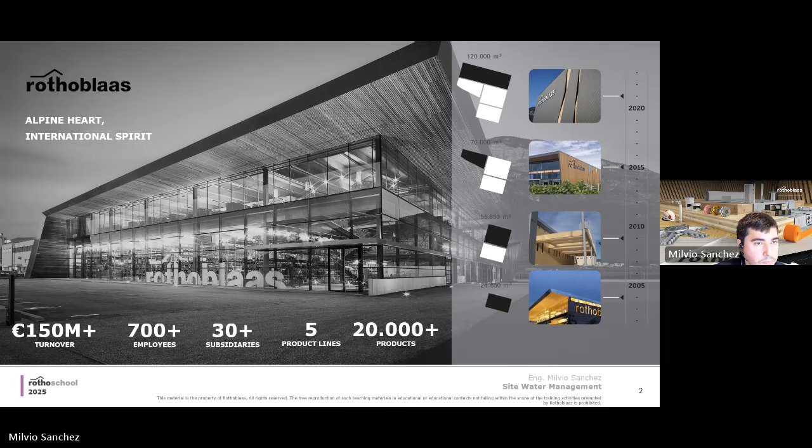For those of you who are not familiar with Rothoblaas, we are an international company. Our main headquarters is in northern Italy, in a city called Cortaccia, but we have 30 plus subsidiaries worldwide, 700 plus employees, and 5 product lines covering more than 20,000 products. Essentially, we are supplying products and manufacturing fasteners, connectors, air tightness and waterproofing like sealant, tapes, membranes, soundproofing, resilient profiles, mats for walls and floors for protection, and tools and machines for installers. So it's a full range for construction architects and engineers in the mass timber sector.

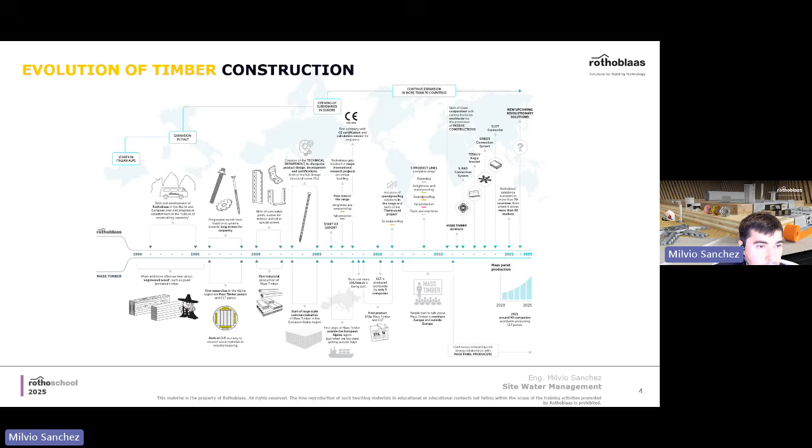A little bit of our history: we started in 1990, pretty much side by side with mass timber construction. Our owner, Robert Blaas, started selling tools out of a van, and then the business developed so much that we started introducing different lines, different ranges of products. In 2006-7, we introduced air tightness and fall protection, in 2011 soundproofing, and in the last trend, pretty much every single year we are launching more and more innovative connectors for mass timber.

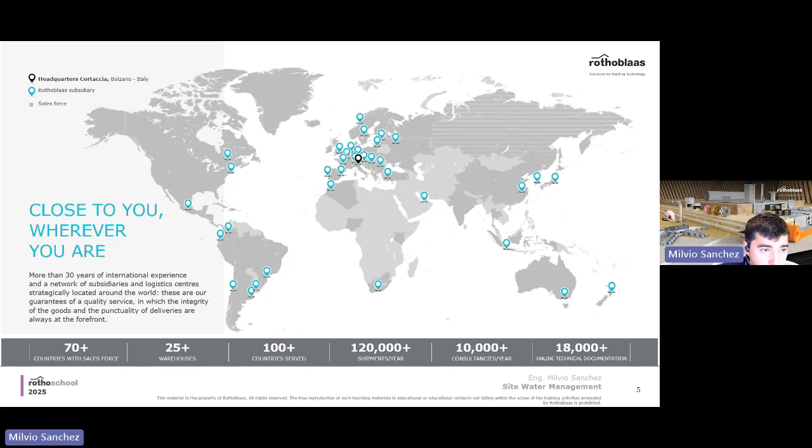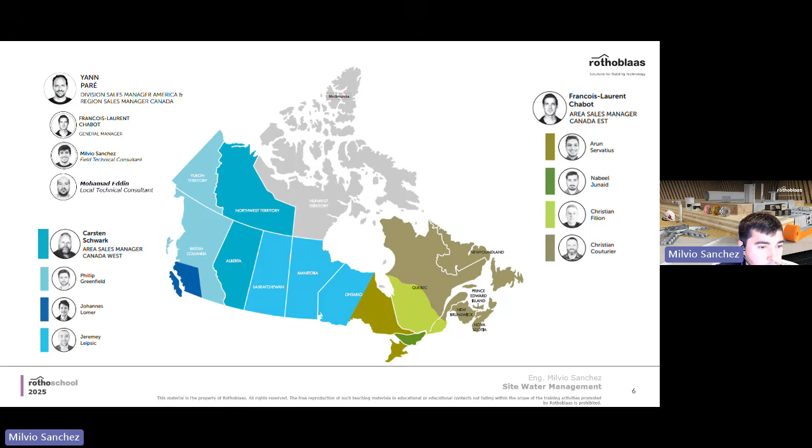Our footprint worldwide is quite wide, so we are pretty much everywhere. We can supply from different warehouses in different countries, but taking a closer look at North America, we have operations in Pennsylvania and Quebec, but we can supply products all over. In Canada, we have a big group, around 20 people, all across the country. It's a big country, so depending on the province, you may find different sales reps, different field engineers, and so on. Same in the US, we have a big group from east to west. Regardless of your inquiry, we're going to be able to supply you with products.

Going in more depth now in today's presentation, I'm going to go over 6 topics: context and challenges, understanding water risk on site, moisture and timber connections, which is a more structural topic, quality control on screws, design recommendations, and finally site water management best practices.

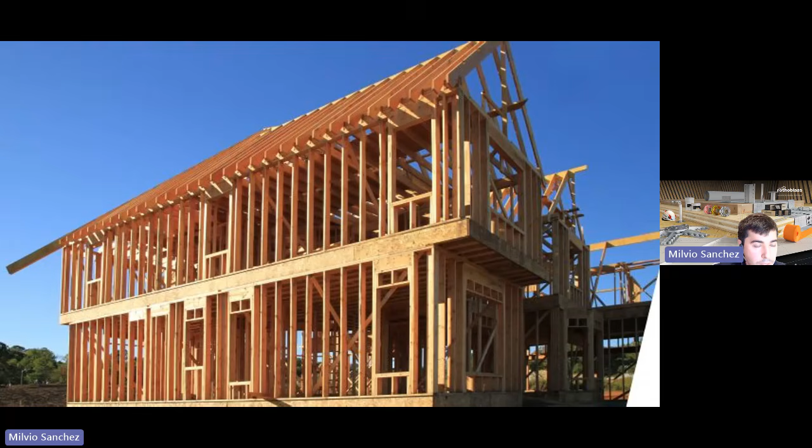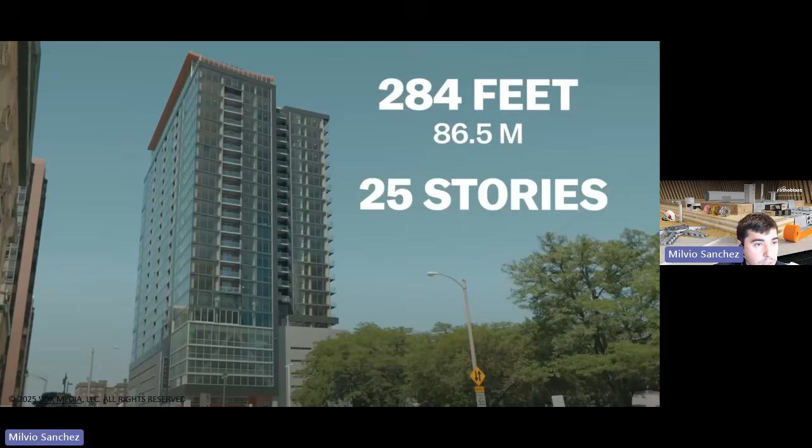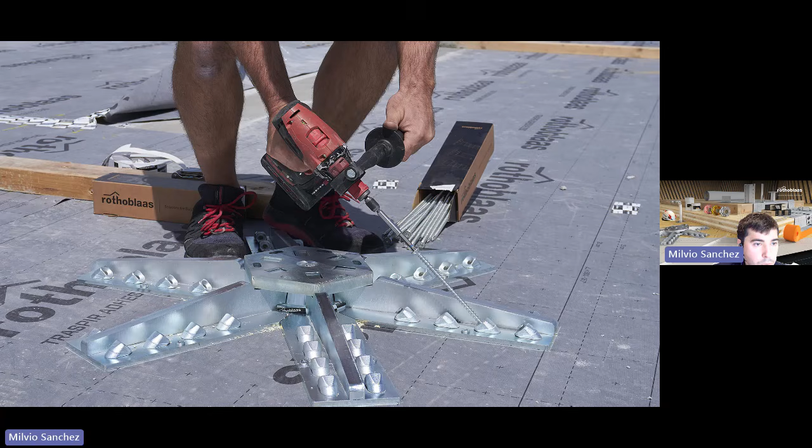As I said, we are going taller and taller, and the sky's the limit for mass timber. Every 5 years or so, when there is a code update, we are able to go higher. Connections usually were done in a simple way, like wood-to-wood connections with a single screw or a bunch of screws. Now the connections are much more complex, requiring several screws at different orientations for different purposes, with the presence of thick metal plates in conjunction with the wood.

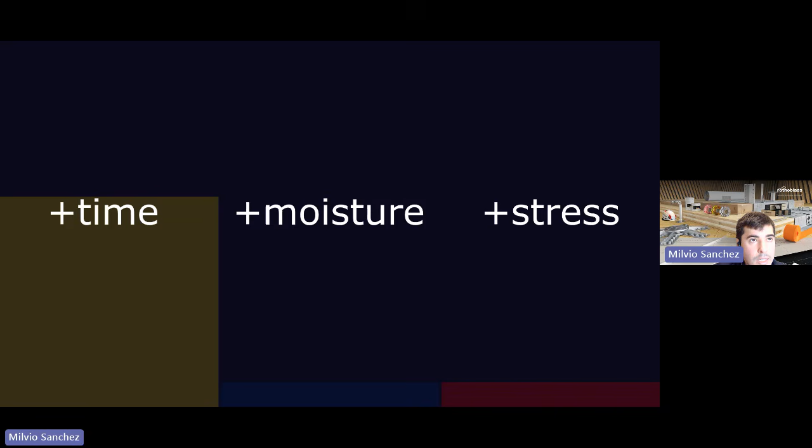The connections are now much more complex, dealing with much more different loading configurations and stiffness than before. Essentially we have larger projects, which is going to take more time to get built, meaning more time on the job site. And if you have larger projects, larger areas, this means larger exposure to weather, so more rain can happen on the job site, meaning more moisture.

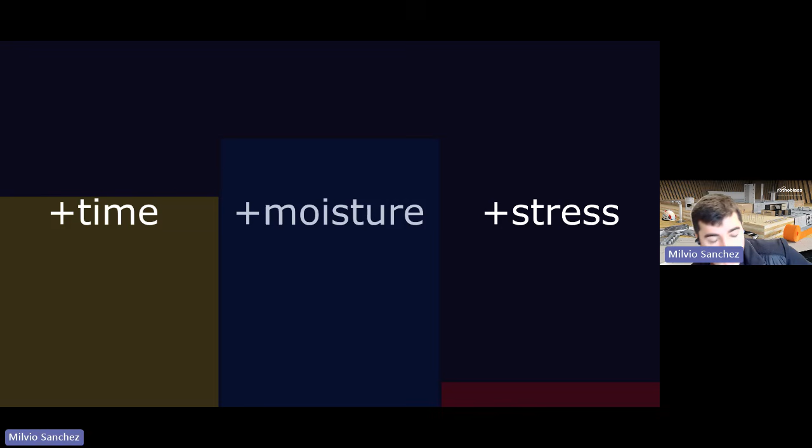With this hybrid concept in mind, different connections have to deal with different stiffness, for example a shear wall connected to CLT, which is a wood to concrete connection. We are talking about much more stresses and much more stiffness in the joints. This is important to understand the topic.

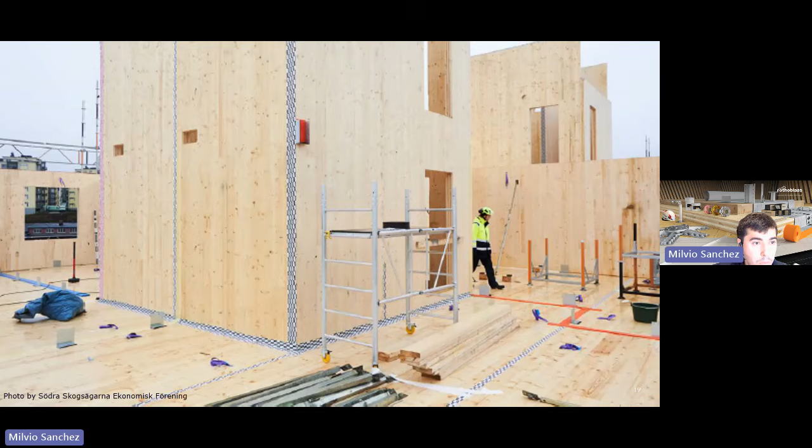Now we go to water risk on the job site. Water is inevitable in the job site. It's gonna rain, it rains everywhere. But depending on the project, depending on the criticalities, and depending on the detail, it might be less or more critical.

For example, here you see a project very nicely done where the CLT walls and CLT floors are all exposed, and tapes are applied in the CLT joints, as you see here, and then in the corners and the end grain of the walls. This is a perfect ideal scenario where the corners, end grain, everything is protected, but still the side grain is unprotected. I'm gonna give you more examples and some research data, and then by the end you can let me know if this is ideal or not, or it depends.

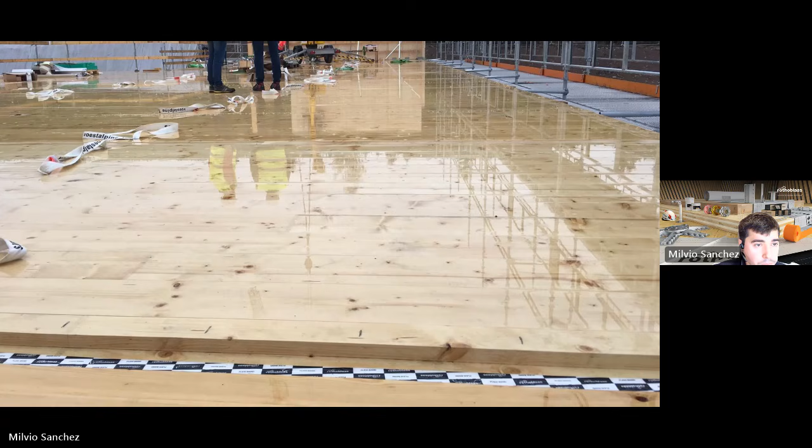Other cases where you see there is even a step, very good for trapping water. It is raining on the job site, and there is only a single strip of Rothoblaas flexi-band trying to do a miracle over there. It's quite funny, but I'm gonna show you some results that taping or no taping actually helps a lot.

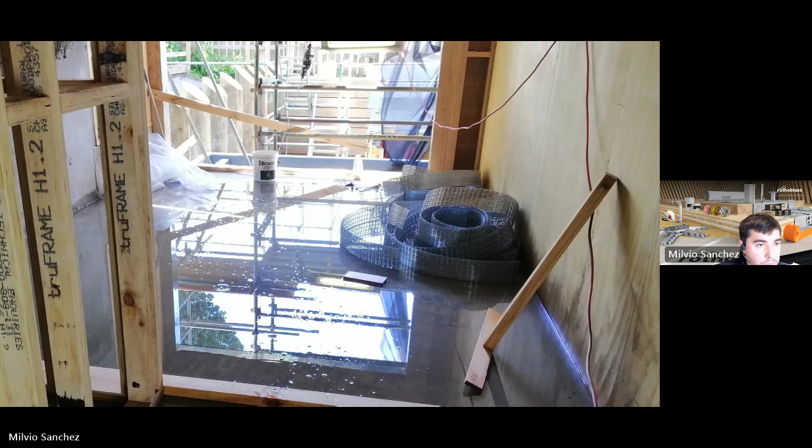Some other projects are not even fully built yet, but they are full of problems, as you see. Water pooling, and the CLT walls are already getting damaged, and decay is starting. It is evident here in this photo.

There are other conditions where the installers and the GC are much more thorough on the design, or maybe this was specified by the architects, where temporary breathable membranes were applied over the CLT panels. But this case is also not ideal. You see that water is forming on top of the membrane, so there is water pooling, and essentially this has to be wiped out. This is not suitable for those conditions.

But still, you can see it's a much more thorough process in terms of moisture mitigation here in this project.

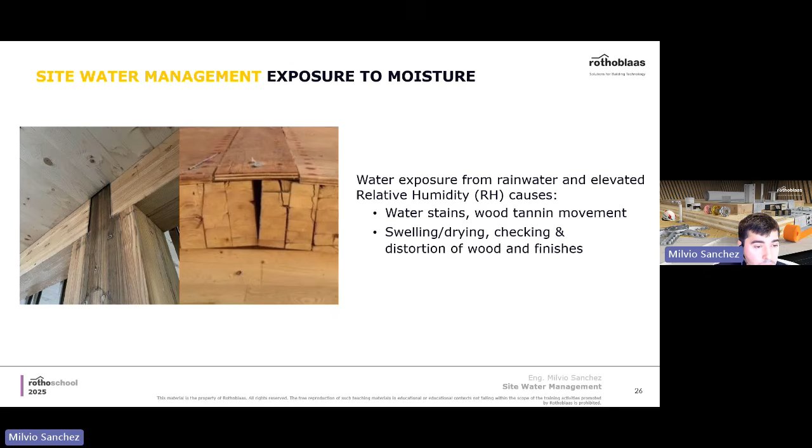It's aesthetically pleasant. There is a sense of biophilia. People are gonna feel warm, feel nice inside those environments. But there is a risk that it may stain, it may get discolored, the timber can rot and decay, and the structural risk where swelling, shrinkage, and distortion of wood and finishes may occur, as you can see here in this connection. So it's evident that water can cause some problems, right?

Talking about moisture content itself, there is a sweet spot which is 16%, where corrosion starts for fasteners. So anything below 16% is considered with zero corrosion. Anything above 16%, corrosion starts to happen, and by 20% moisture content and above, it gets intensified, following not a linear curve but more like an exponential pattern. And by 20% as well, we create all the conditions for fungi to develop and decay of timber to happen. So it's really important.

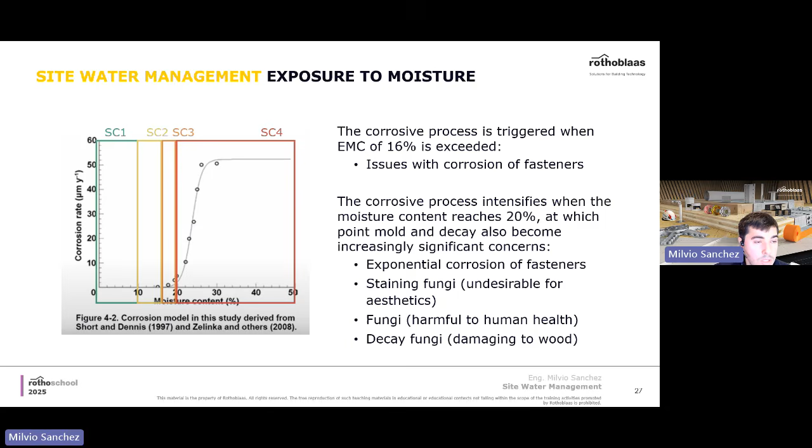So those were the thresholds defining what is the dry service and the wet service condition. Anything below 19%, for example, is considered dry, and anything above is considered wet.

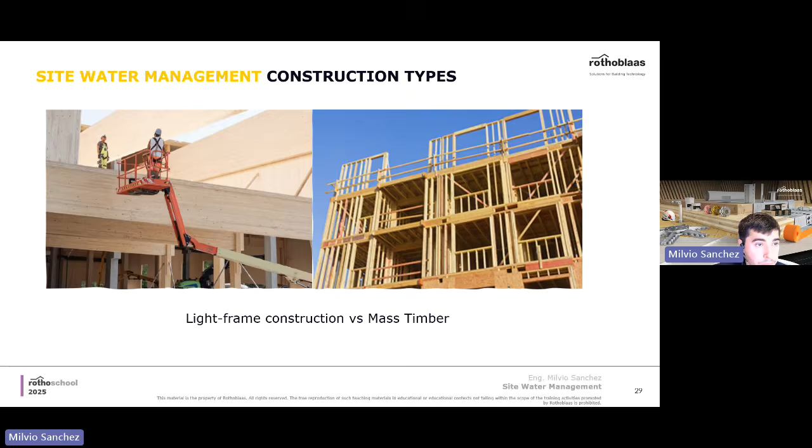I made a joke about taping or no taping, but here in these results there is some nice external research showing that either a half-lap connection between CLT or a butt joint, no matter what, if left exposed, will reach moisture content higher than 20%. One is going to be after 4 days and the butt joint after 17 days, but they're going to reach wet service condition in the field.

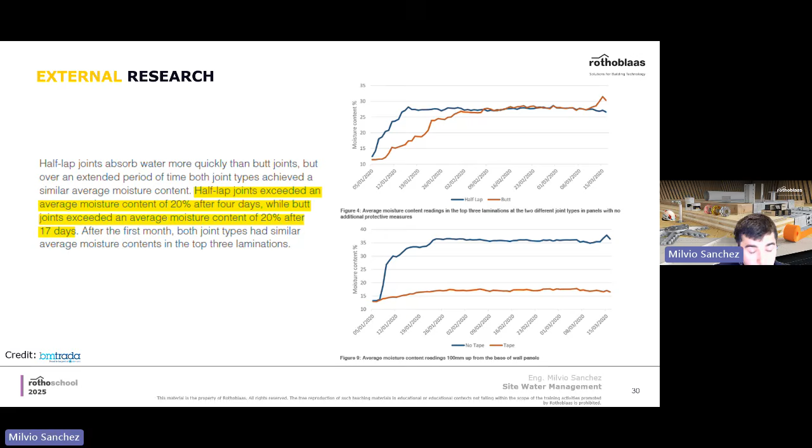But if you tape it, you maintain the moisture content of the panel below 20%, below 19%, and in this case you have a dry service condition. So the tape may seem something simple, but it helps a lot.

Here you can see some photos of the results. If you tape the end grain as well, you mitigate a lot of moisture traveling to the end grain, which travels 100 times faster than the side grain. Tapes are important, as I mentioned on the graph - it is relevant, but it's not a really moisture-proof configuration. Tapes have to be considered only as protection against short-term wetting, not as an effective long-term exposure solution.

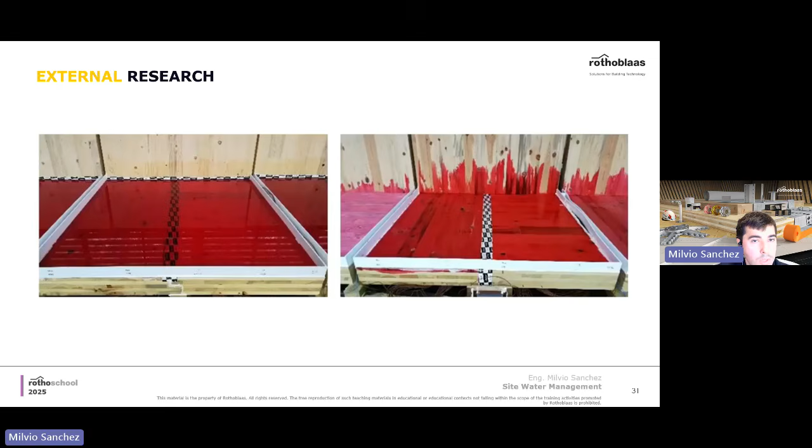There is other interesting research out there from RDH. They had a wet CLT on a job site, and the concrete was about to be poured over the CLT, and they were thinking: should I let the CLT get dry, or is it fine to pour the concrete? The CLT is going to dry out eventually.

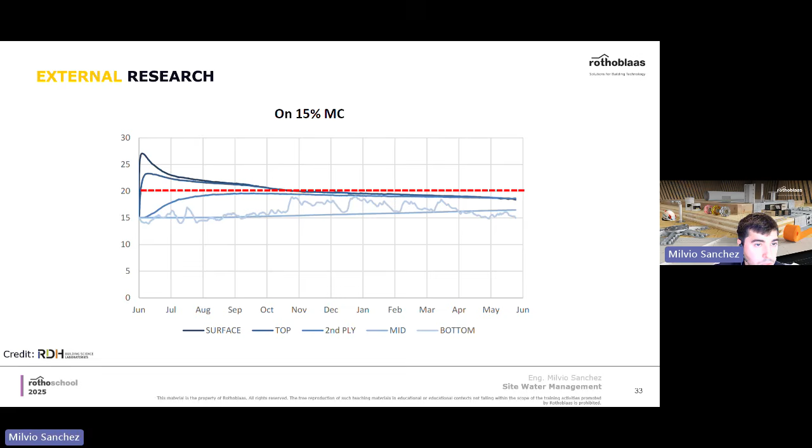This was a very interesting research where they investigated all the lamellas of the CLT and measured the moisture content. As you see here, in the first condition the surface and bottom lamellas of the CLT hold different moisture contents. But pouring concrete in this configuration, after pretty much a year from June to June, they were able to get this panel dry. So now we can call it a dry service condition for these panels.

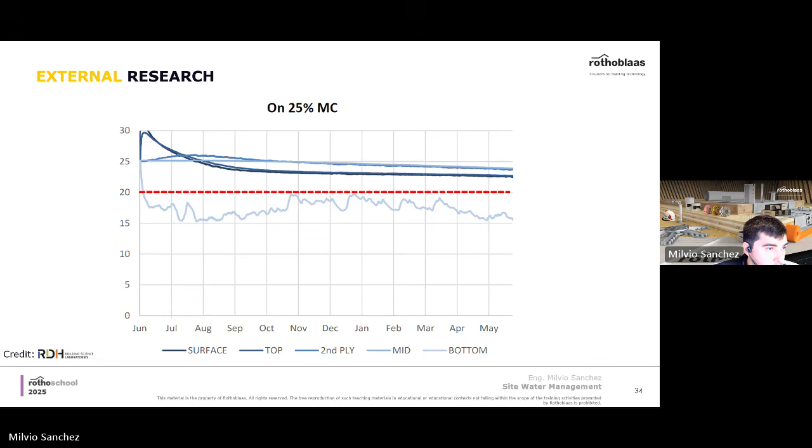In a much more wetter configuration here, June to June, still pretty much all of the lamellas are, let's say, just the bottom one is under a dry service condition, but all the others remain in a wet service. So this is a much more critical scenario. They also simulated one condition where they applied artificial rain, and the results are even worse.

So it's really important to point out that the side grain of the CLT also matters. As I said, it takes longer to get wet, but it also takes longer to get dry.

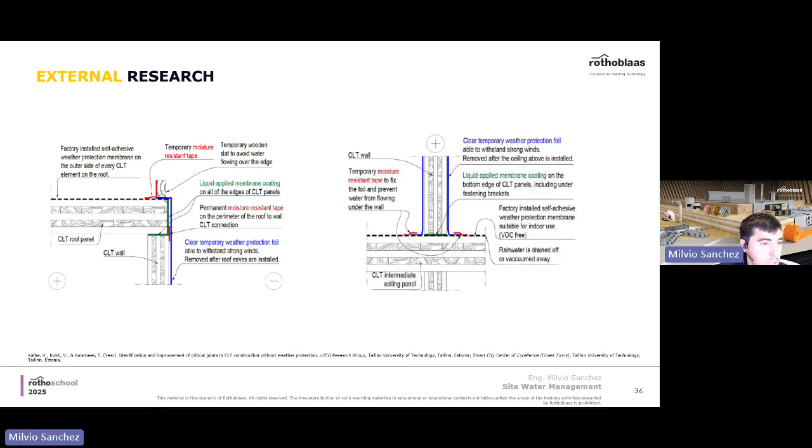Other researchers out there as well have really interesting recommendations. They mention that CLT panels have to be installed with a factory installed self-adhesive, either temporary or permanent membranes on the side grain, all the corners with a moisture resistant tape, end grain as well taped, and also liquid applied membranes could be used. So different conditions for different types of joints. Really interesting research out there.

Regarding mass timber construction, the target or threshold we should be aiming for is a moisture content of 16% before enclosing the project. This is a little bit different than light wood framing construction, which should be around 19%. But with mass timber it's really relevant to keep that number in mind.

This APA guide has some really relevant and interesting guidelines in terms of storing and handling of glulam beams, and this also works for CLT panels - protecting from rain, not leaving it exposed to the ground, leaving gaps for ventilation, protecting from the sun. This may seem obvious, but it's nice to have it there in a specific guide.

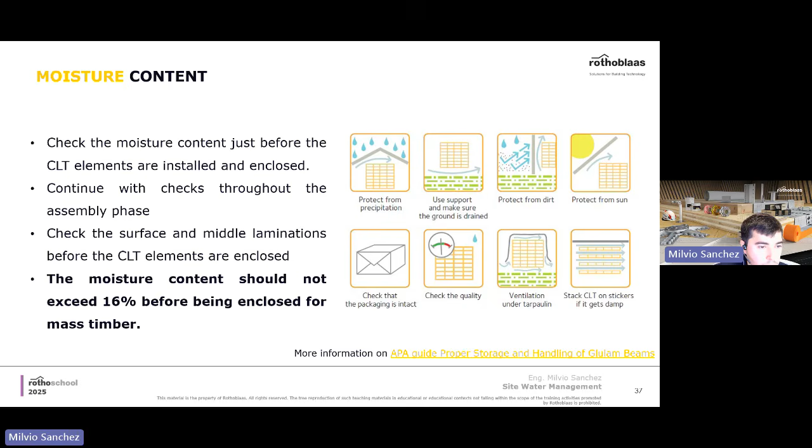Now we are changing the topic. We're going to hit a more structural topic, which is moisture in timber connections and the behavior of moisture. What can happen in a timber connection? What are the effects and consequences?

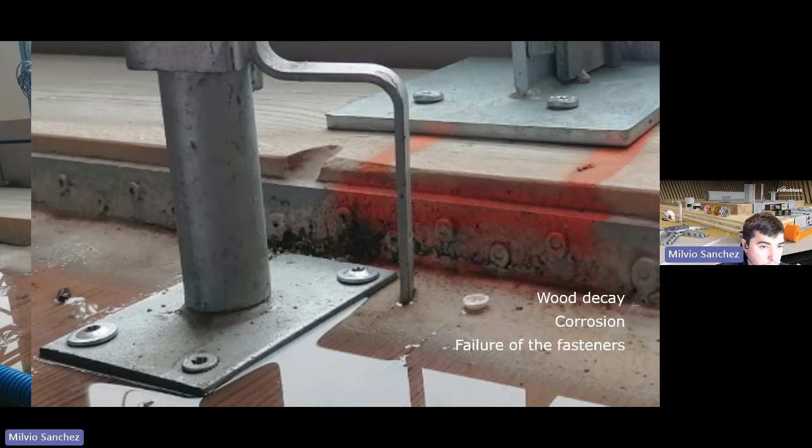Also in this case, if you pay attention, you're going to notice that there are 3 different fasteners connecting steel to wood, where only one has been specified. You see a countersunk head, a flange head, and also the correct X head. They are also a little bit misaligned, and we don't know the torque of these screws. I could list 2 more issues in this connection, but let's keep these for now.

Coming from that connection example, Rothoblaas decided to invest in an experimental campaign. One of the experimental campaigns investigated moisture. There are many, so I'm going to quickly give you an overview about it.

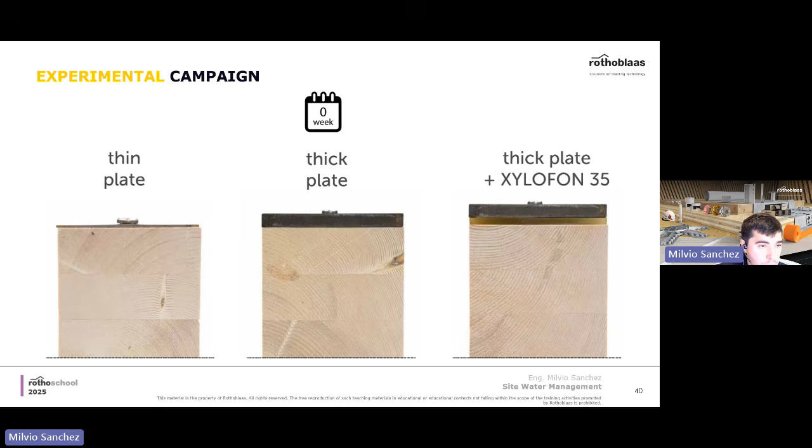This one's idea was to assess moisture content with a thin 2 millimeter plate, with a thick 12 millimeter plate, and with a thick plate with XYLOFON, which is a resilient compressible acoustic profile. In this case, we were able to measure the moisture exposure in a wet condition.

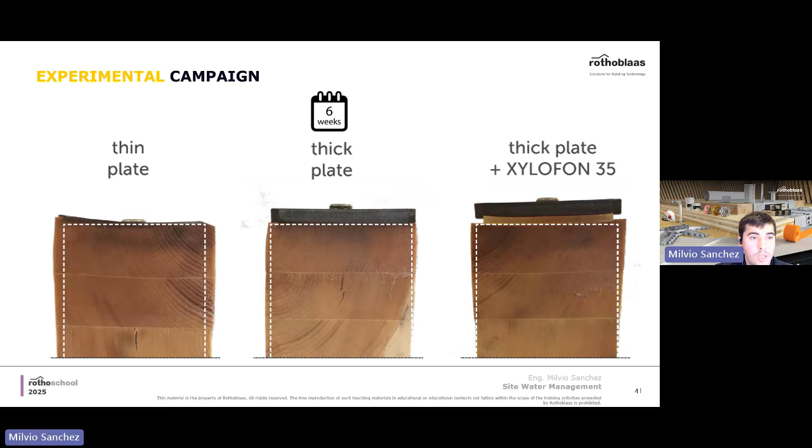After 6 weeks, this was the result we observed. The wood was expanding and swelling, and the thin plate was allowing that movement because it was not super stiff. As opposed to the thick plate configuration, which was much stiffer and didn't allow any movement at all. All of those stresses and swelling forces go directly to the screws and the connection. We also have an intermediate configuration with XYLOFON, which allows some sort of larger load distribution over a larger area.

So why are steel to timber connections important? Because they are everywhere now with hybrid construction, and this configuration is critical because, as you may know, the longitudinal direction of the glulam beams and the timber itself doesn't swell or shrink that much - it's negligible. But cross-sectionally, in the tangential and radial directions, it is not negligible.

In this case, we are placing timber elements inside steel profiles where they are confined and constrained. So if they want to swell, they can't swell - they're going to be restrained by very stiff elements. This is where issues may arise.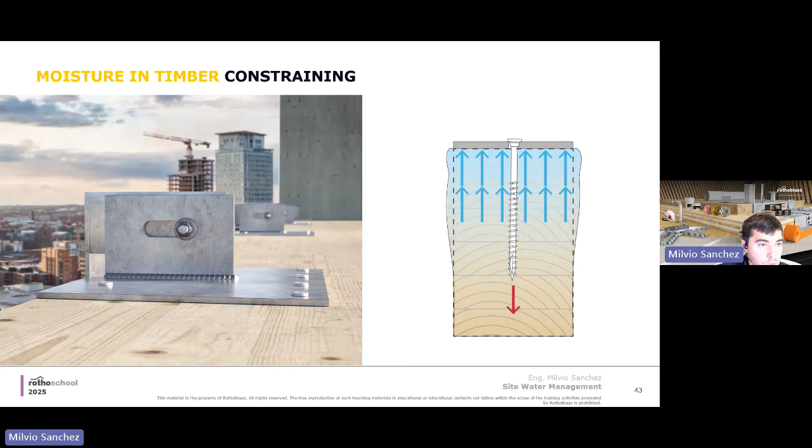So let's say, looking at this animation, you have a facade with a thick plate connecting steel to wood with a screw. If this gets wet, the timber will be a little drier on the interior and very wet on the exterior. So there will be a gradient of moisture, of moisture transport, that's going to push this screw and create an unintended force on the top of the plate, and this is going to be absorbed by the screw. This is something that most of the time is not considered or assessed during the design phase, so it's a critical unintended force due to swelling that may happen on the job site as well.

Other research campaigns that we have completed assessed thick plates with CLT under high moisture content. We analyzed the swelling forces, thick metal plates, and hydrogen embrittlement effects. At the University of Alberta, we also analyzed the behavior of self-tapping screws under moisture content change in glulam beams, placing load cells and evaluating how much force was being transferred due to swelling.

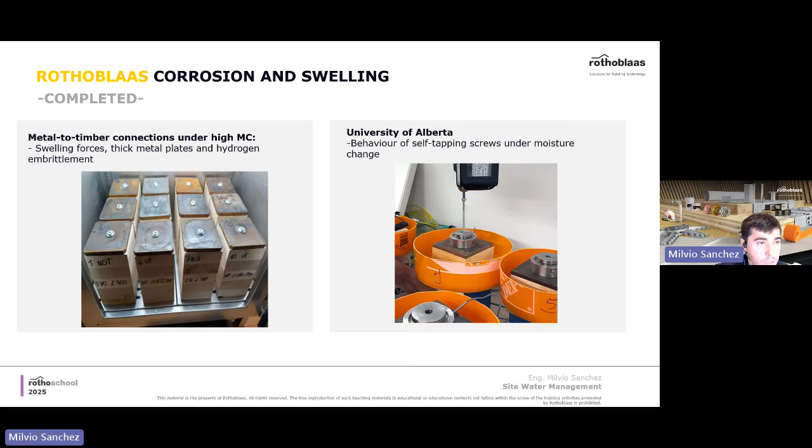One of the interesting results: if you install, for example, a VGS 9 by 200 under a standard 12 Newton meter, which is the recommended installation torque for this screw, versus installing it in an over-torqued way, like 60 Newton meters, you're going to have different residual tensile forces. With 12 Newton meters, the standard and correct installation, you're talking about a residual force on the screws below 2 kilonewtons, which is totally fine.

As I mentioned in the first few slides, we also supply tools. We manufacture and develop, and one of the tools we have is a torque limiter. I forgot to mention that in this case, a torque wrench was used to close the screw and finish the installation. But we have a tool called a torque limiter, and it does exactly what it says: it limits the torque during installation.

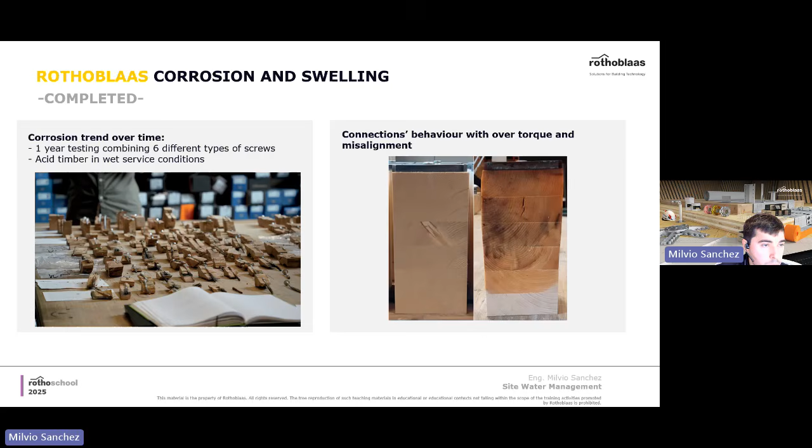Other research we've done assessed swelling as well, with different configurations involving misalignment and acid timber in wet conditions, because depending on the wood species, it matters a lot - corrosion may be more or less significant depending on the wood species. Ongoing now, we're studying membrane behavior in the presence of damage - what happens if water gets inside, and with a breathable membrane, how much time it takes for the moisture to escape, and the difference between types of membranes.

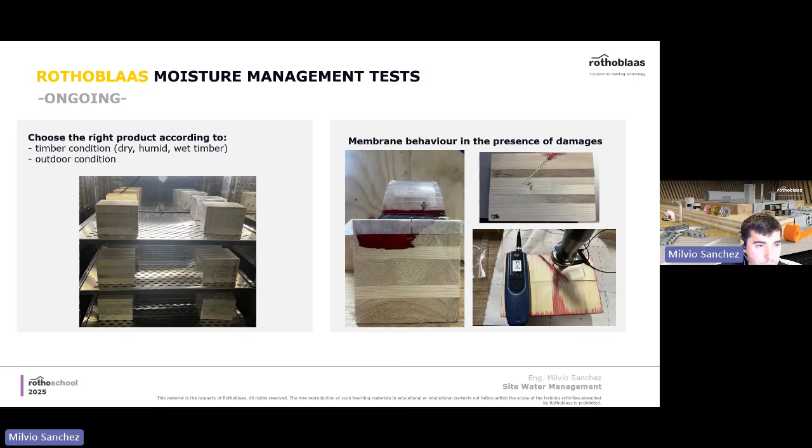But with steel to wood, there is a much more critical configuration with the same 6% moisture variation - the increase of force is much higher and significant. That should not be neglected.

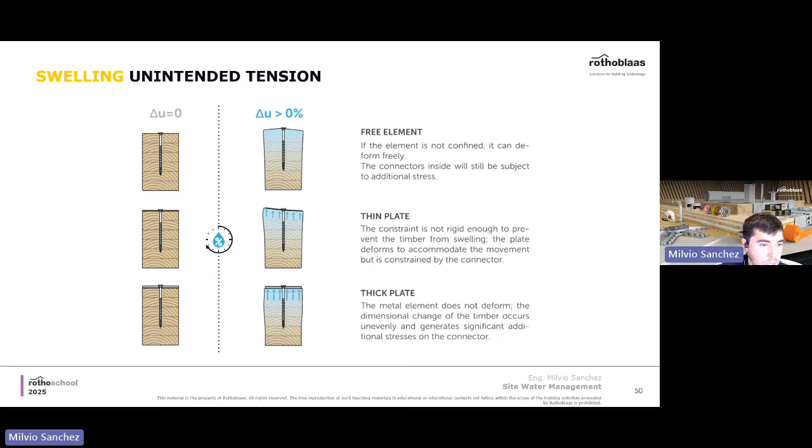Another interesting fact we observe is that wood without any elements or steel on top of it is going to freely swell and move without any blocking. A thin plate, since it's not super stiff, is also going to allow the movement of wood. But a thick plate is the most critical problem, where wood cannot swell and all of those forces are transferred to the screws or to the connection in particular.

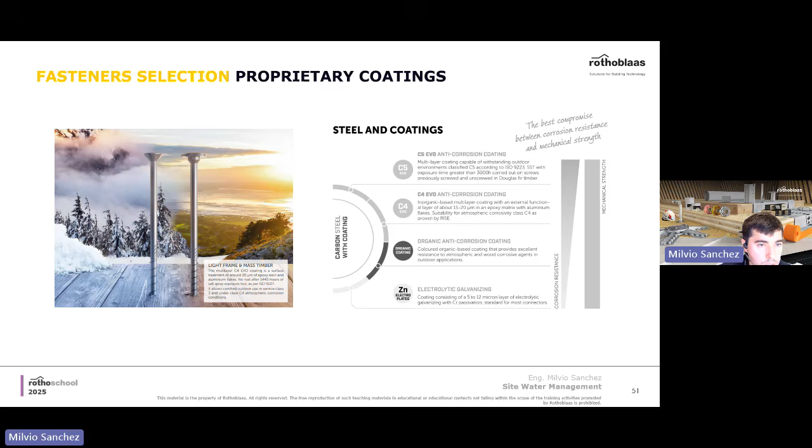At Rothoblaas, we have different proprietary coatings - zinc coated, organic coated, C4, C5. The main advantage of this coating is that it gives a very high corrosion resistance. So the corrosion resistance increases and the mechanical strength is kept the same - it doesn't impact the mechanical strength of the screws. As opposed to other coatings, where the bigger the corrosion resistance, the lower the mechanical strength is. So that's one of the advantages of using our coatings.

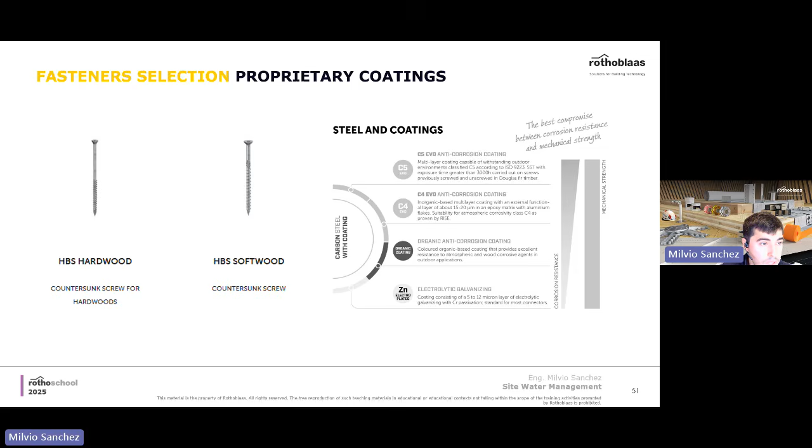We also have a different range of products like hardwood screws and softwood screws that don't require a pre-drill if you're dealing with hardwood that has a higher installation torque. We also have products fully certified in the US, Canada, and Europe - VGS A4 and HBS plate, the plate screw for steel to timber, and fully threaded screws in A4, which is a very high corrosion resistant steel grade.

On top of the coatings that we have, we also provide a full range of stainless steel options, going from high corrosion resistance to less corrosion resistant screws. This is the main chart here: depending on the project you're building, the location, the timber species you have, and the moisture content, you may have to use different types of fasteners. One may not be suitable for that area and vice versa.

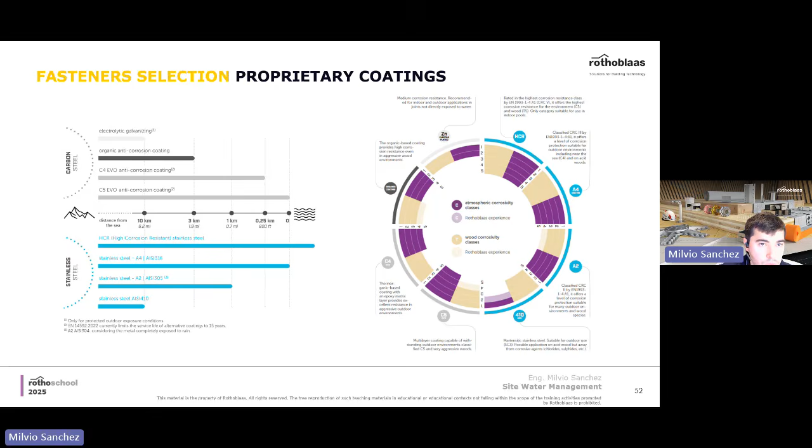Now I have a few slides about quality control.

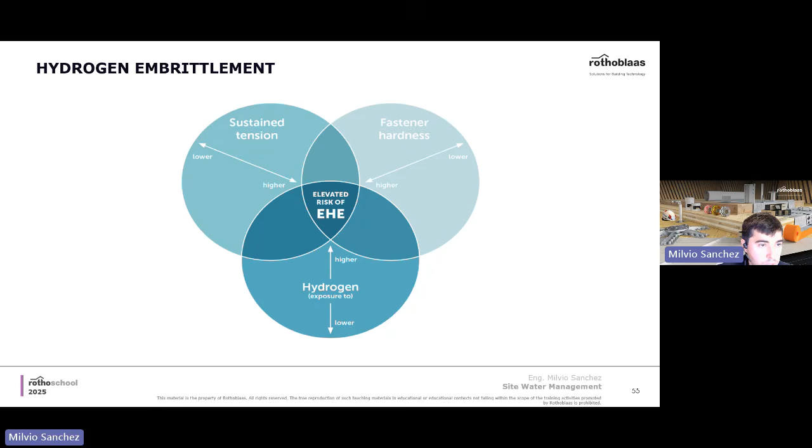So premature failures may occur, which means a failure that is below the expected failure zone. One of the conditions could be due to hydrogen embrittlement, which is fairly associated with moisture on the job site - the exposure to hydrogen. It's also a matter of how big your sustained load, your sustained tension, and the fastener hardness are. Environmental hydrogen embrittlement means the type that happens outside on the job site. The bigger the sustained load, the bigger the hardness, and the bigger the hydrogen exposure, that's a sweet spot where all three combined may create brittle failures. If you've never heard of hydrogen embrittlement, it is a permanent loss of the ductility of the metal caused by atomic hydrogen, in combination with load, that can lead to a failure over a certain time.

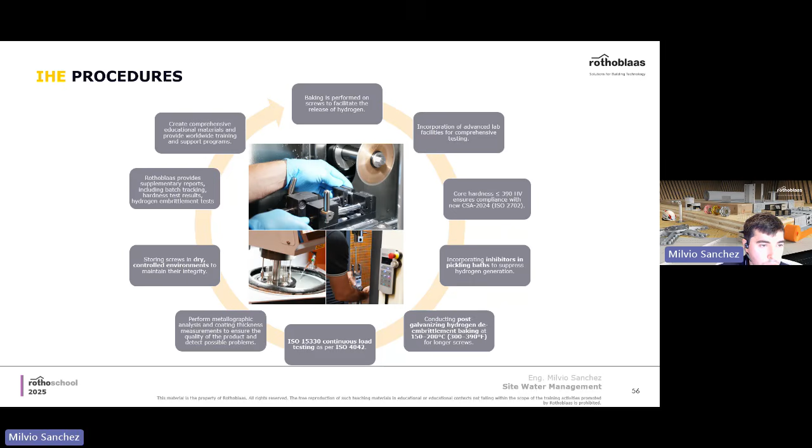There are two types: environmental, which can happen with exposure to moisture, and internal hydrogen embrittlement, with exposure to hydrogen during the manufacturing plant. To control internal hydrogen embrittlement, we have a very thorough quality control practice in our facility, where we have core hardness set to below 390. We have inhibitors in the pickling bath to suppress hydrogen generation. We do post-galvanized hydrogen embrittlement baking on screws, and we manufacture according to ISO 15330.

In order to tackle environmental hydrogen embrittlement, we developed this guide, a smart book, and we're launching a new one very soon, where we give trainings to the audience, like this one we're giving now. We give installation trainings, installation support, technical support, and we also invest a lot in research and development - product innovations, waterproofing membranes, proprietary coatings, torque limiters, and so on.

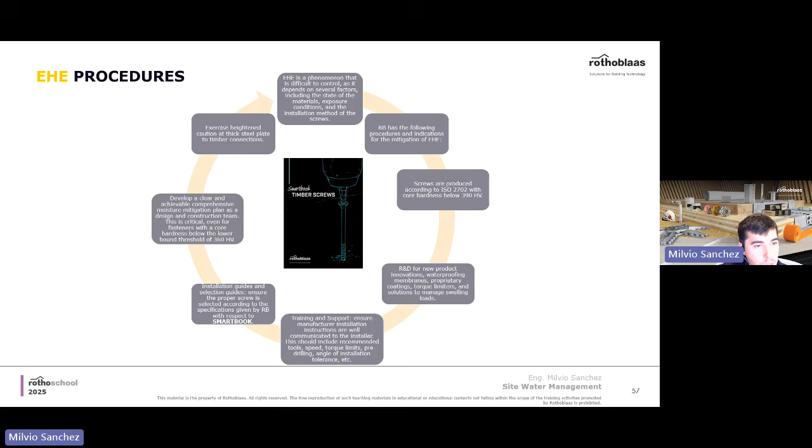The CSA O86 is the first standard worldwide to talk about specific hardness for screws in the market. There you may find that case-hardened carbon steel self-tapping screws shall not be greater than 390 Vickers, and they have to satisfy requirements of the internal hydrogen embrittlement test.

So this is what Rothoblaas does - we have screws below 390 Vickers in accordance with ISO, and we perform internal hydrogen embrittlement tests on the screws as well. This is really relevant, and we hope to see that adopted on other standards worldwide.

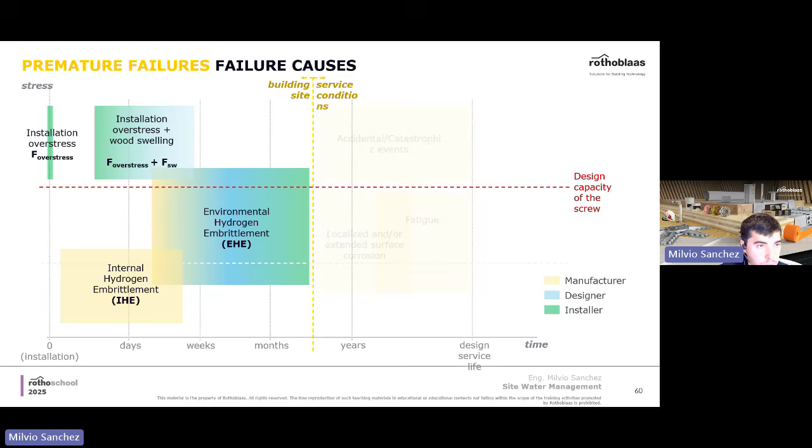Now I have some design recommendations to give to you. It's mainly targeting structural engineers, but it's really interesting for the installers and architects as well in the audience.

First of all, the CSA O86 talks about dry service and wet service conditions. As I mentioned before, dry service is where the average equilibrium moisture content of wood is 15% or less on average, without exceeding 19%. This is the maximum threshold - anything above 19% is going to be considered wet service condition.

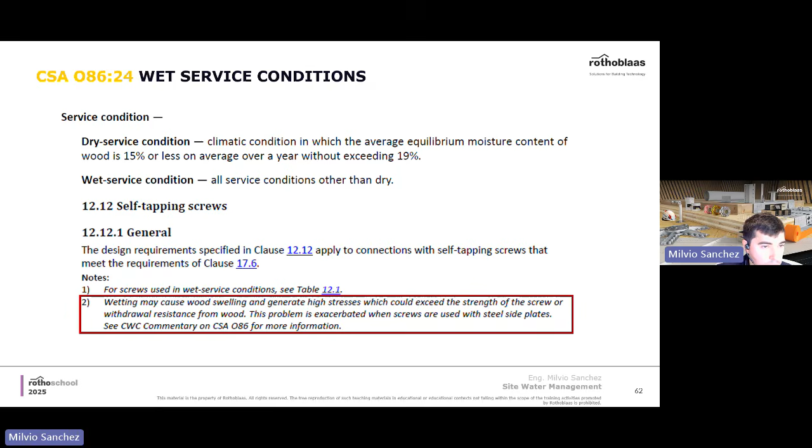There are some footnotes in the code that say wetting may cause wood swelling and generate high stress, as I presented before. This problem is exacerbated when screws are used with steel side plates - this is exactly one of the research campaigns that I presented to you.

Other codes around the world are touching on this topic too. The Eurocode 5, 2025 execution draft, has a moisture control plan section stating that a target equilibrium moisture content during fabrication, erection, and in service has to be in place, and any detrimental swelling and shrinkage has to be assessed and avoided, and the timber itself has to be protected against any moisture uptake.

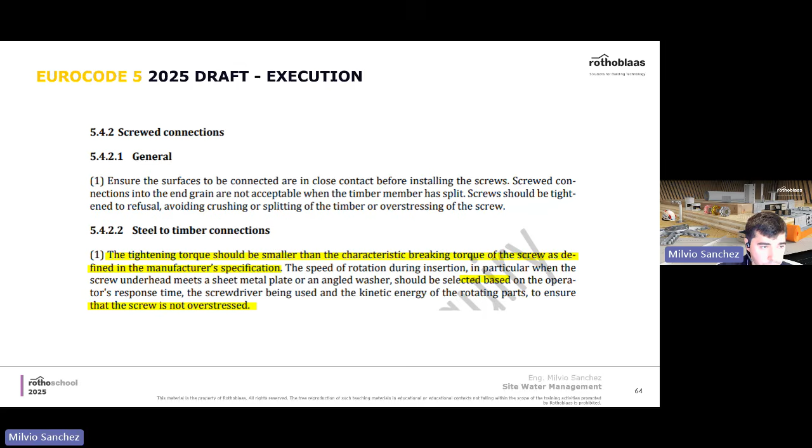Not only about the moisture plan, they have a really nice section about steel-to-timber connections, where they mention that the tightening torque of the screws should be defined by the manufacturer and should be respected and followed as specified. Most importantly, the screws should not be overstressed.

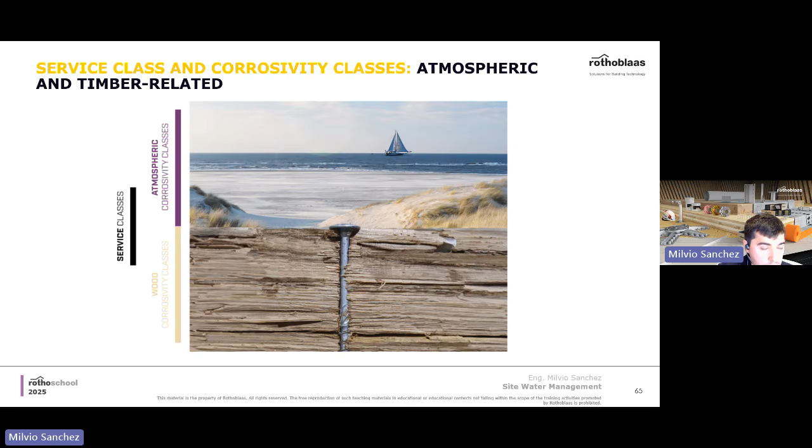Now I have a photo to highlight how a connection lives in the real world. First, we always have an environment that this connection is exposed to. We have the moisture content and relative humidity, which play an important factor on the moisture content of the wood - reducing or maintaining the maximum capacity we can achieve. But also the screws or steel cylinders always live in timber. So the environment the connection is present in, the moisture content, and the wood species or environment the screw is installed in - all three matter if we want to talk about durability.

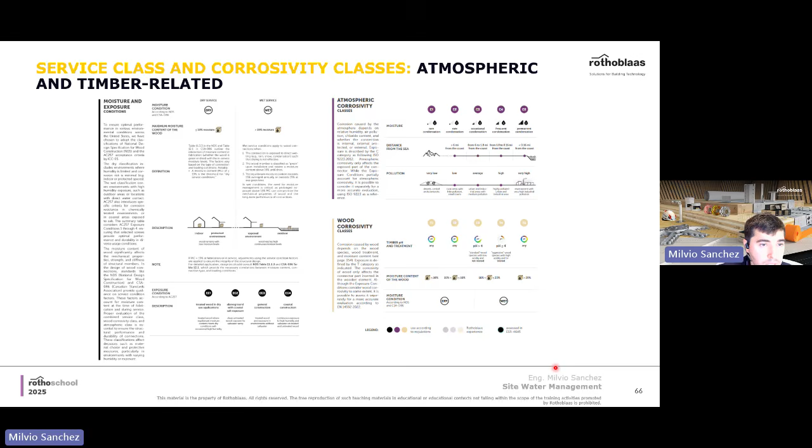In our literature, you can find definitions of dry and wet conditions, whether you have an internal element exposed but covered, exposed not covered, and different atmospheric corrosivity classes, which depend on moisture content, distance from the sea, and pollution. It goes from class C1 to C5, and also wood corrosivity classes defined by the pH of the timber and the moisture content. So you may have different and more aggressive conditions - the higher the number, the more aggressive the condition.

Now I have a little exercise for you. Let's say we are building this project in Denmark with spruce pine fir, which is not an acidic wood. We are close to the ocean and close to an industrial area, meaning a lot of pollutants, and this area rains a lot. So if we are talking about designing the interior connections here, these connections for sure are in dry service condition - it's not raining inside the buildings.

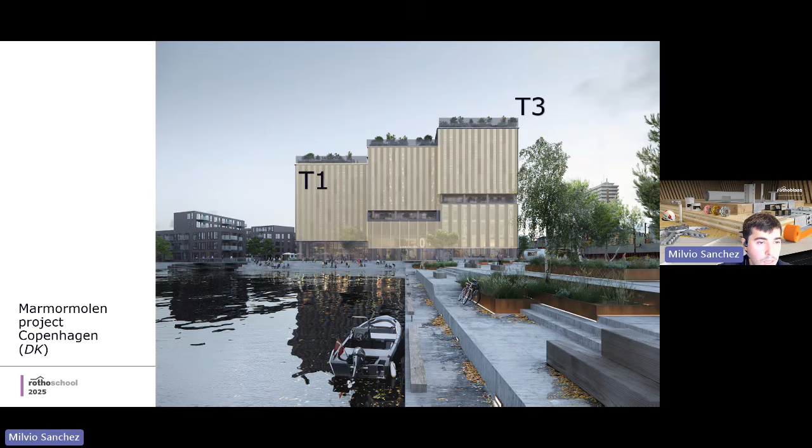So this can be treated as a T1 class, which is the least aggressive of all of the classes. And the ones that are exposed and not covered, for sure, are going to see higher moisture content. So the same timber, same connection have to be designed or specified as a T3 class in this case.

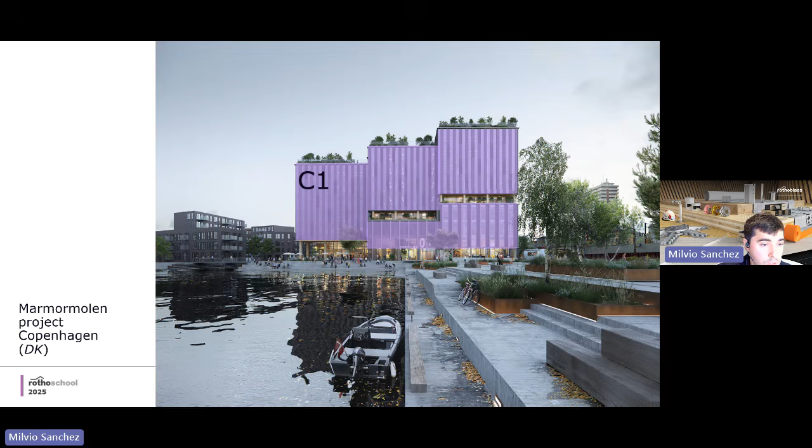When we talk about the interior in terms of atmospheric corrosion classes, in the interior it doesn't rain, pollution is controlled, there are humidifiers all around. We are talking about a C1. But outside we have for sure a C5, which is an area close to the ocean in an industrial zone, and it's raining a lot.

So it means that in one single project, depending on the condition you look at, you may have different fasteners suitable for these configurations, and different ratings or different risks that may occur in different conditions. Most importantly, I talked about wet service condition and dry service condition, but I didn't mention the temporary wet service condition.

So if you have this photo here, you have a steel to wood connection, all the CLT walls and floors are exposed, no protection on the end grains at all. And of course, there will be a time that the roof is going to be placed and this building is going to be enclosed. But until the roofing is placed, this connection or this system, this first floor for sure has to be considered as a wet service condition, a temporary wet service condition. This is important because the fastener, the connectors, everything you choose has to be able to deal with the wet service and the temporary wet service condition.

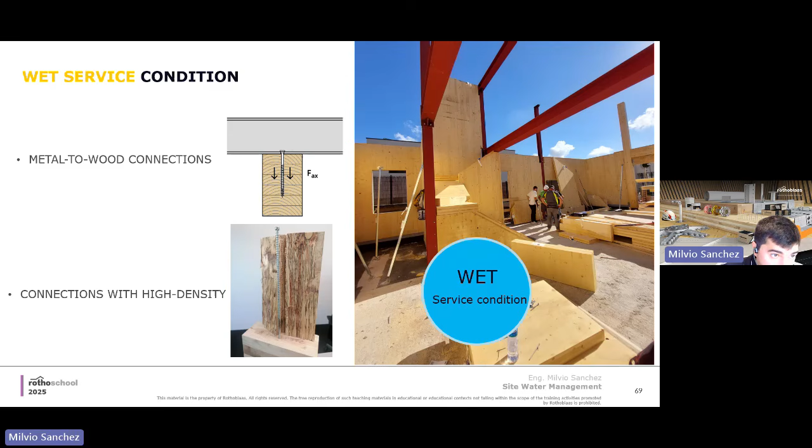For how long will they be temporary? Sometimes it's a week or two, sometimes it's 6 months, sometimes it's a year or two. And this is relevant, as I mentioned, in metal to wood connections. And if you have different stiffness or different rigidities, for example very high dense wood versus not high dense wood, it creates similar behavior with metal to wood connections.

Fastener inclination - we have investigated a few research campaigns in order to be able to tell something to the timber sector, because currently for wood screws there is no clear indication about what is acceptable. For the concrete world that is plus or minus 5, but for timber screws, as you see here, if you can see a screw already crooked or misaligned, for sure you can tell this screw is misaligned by at least 10 degrees. And if you cannot see it, you can still have a 5 degree misalignment.

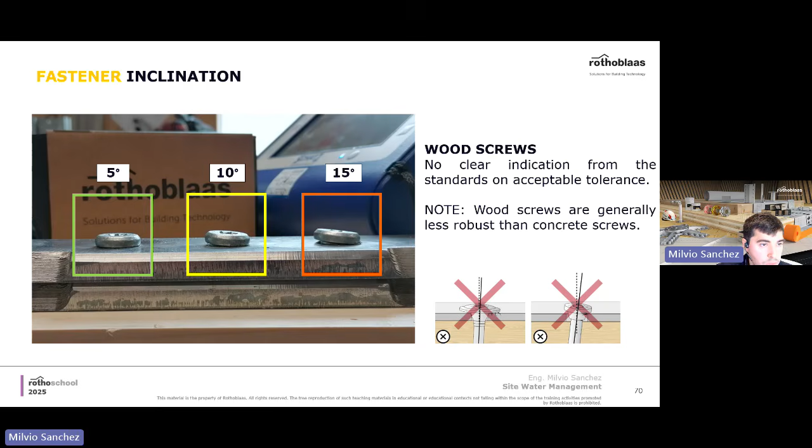But we put it in green because with 5 degrees, it seems to be correct. It's fine, this plus or minus 5. It doesn't impact the capacities at all. And this is where the installer should aim. But anything above 5, 10, 15 degrees is not acceptable at all and has to be reinstalled.

So let's say you are doing a site inspection. You look at this connection. You were about to say that this is a pass, but it's a steel to wood connection - as I said, it's a thick plate. But then if you look at it from a different angle, you may see that all of these screws...

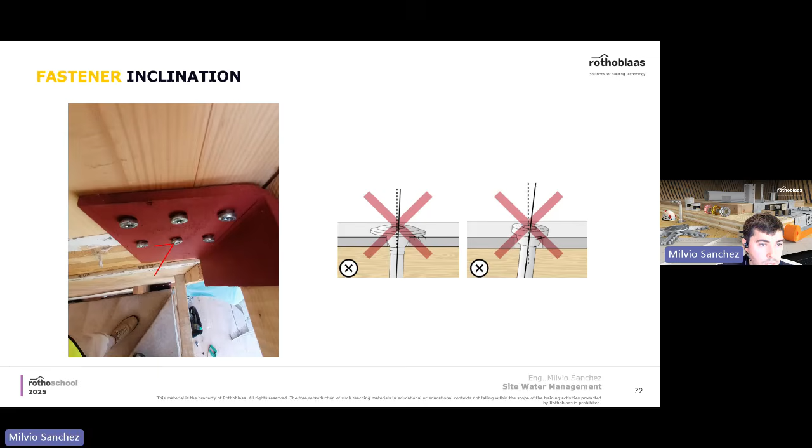...are actually not seated on the plate. They are misaligned by almost, I don't know, 30 degrees or even more than 15 for sure. So for sure, the ideal configuration here is to replace these screws and install this again. So you see that the inclination sometimes is neglected, and this happens on the job site every single day.

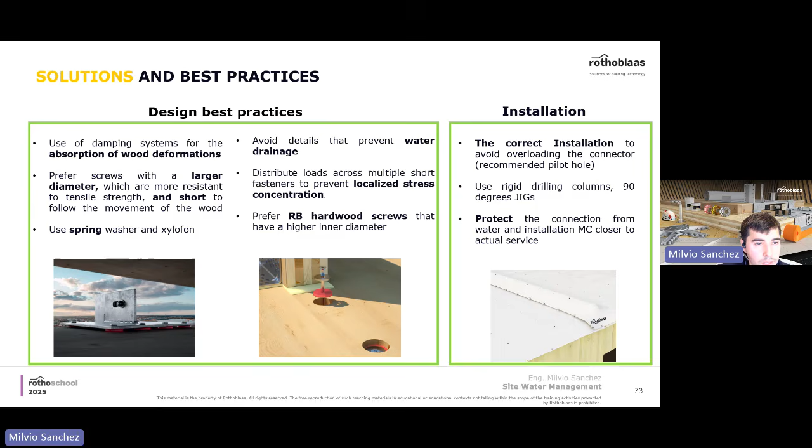A few of the design best practices we recommend: whenever possible, or when risk is higher, use a damping system for absorption of the wood deformations. So preferring larger diameters and also short screws - this is going to be able to follow more the movement of the swelling and less unintended stress is going to be transferred. Spring washers as well, and prevent details that allow water to be trapped, and distribute the load across multiple short fasteners to prevent localized stress. And of course, install following the manufacturer's recommendation, using jigs, protecting the connection with tarps, membranes, tapes, and so on.

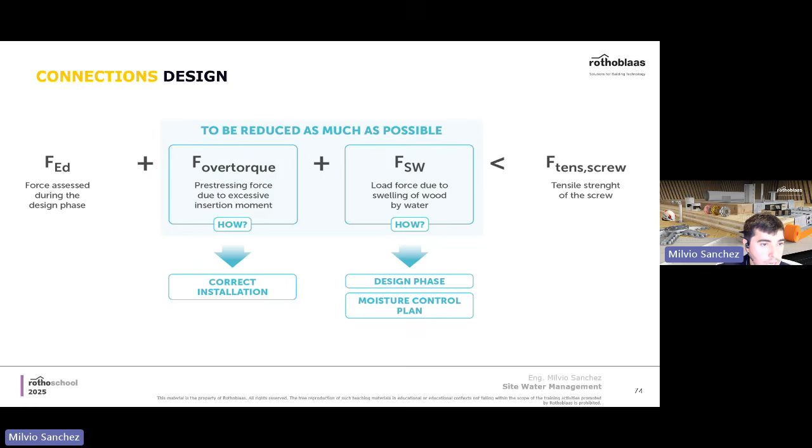During the design phase, currently the design load is always calculated in a way that it has to be lower than the tensile strength of the screw, the resistance of the screw. But there are two components that cannot be neglected, or that have to be reduced as much as possible, which is over torque and swelling. So those unintended tensions have to be either included in the design or minimized as much as possible by correcting installation and by a moisture control plan in action.

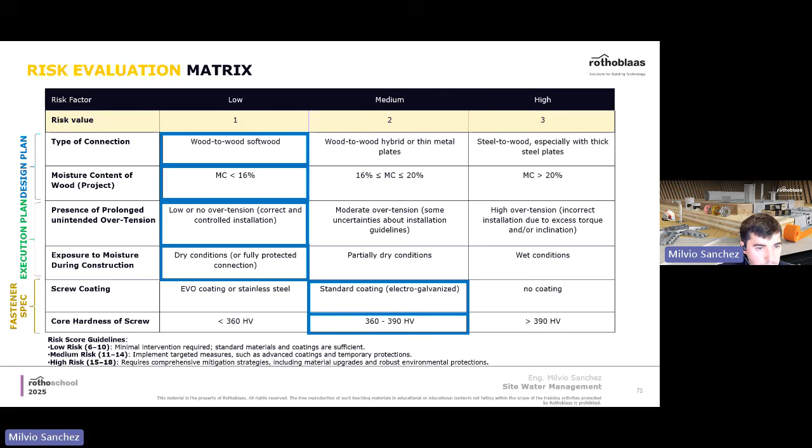So you can play with this matrix and develop your own as well. This is just a suggestion, but it's interesting and important to say that not every single connection is high risk, and not every single connection demands the same level of moisture protection.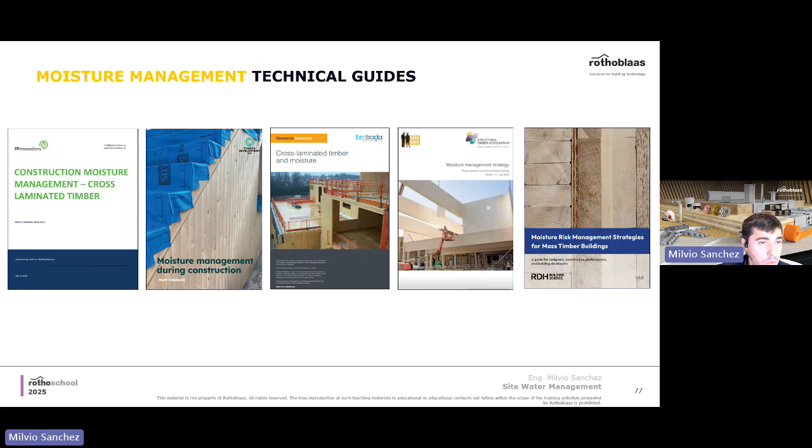Now the last and quick session here of the presentation: site water management. There are different guides out there, prepared by FP Innovations, by BM Trada, or RDH. All of these guides represent the state of the art in order to have a successful project.

I just brought a few slides here from RDH, which is a very interesting guide where they classify the different runoffs and also different connection cases - which ones are more critical, which have low moisture exposure versus high moisture exposure - and also different detailing or protection strategies you have to think about.

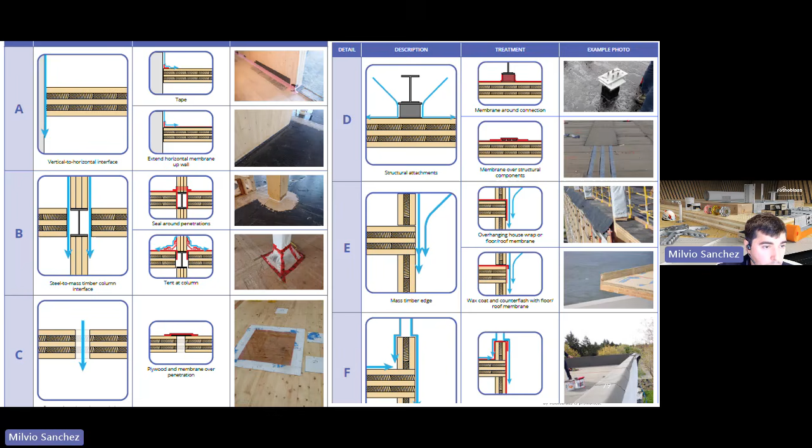So either taping or fluid membranes, or protecting the end grains on the corners, and also the nail laminated timber US design guide. They also talk about recommendations from isolated areas, protection only in isolated areas, going up to a high protection level where all of the panels are wrapped up.

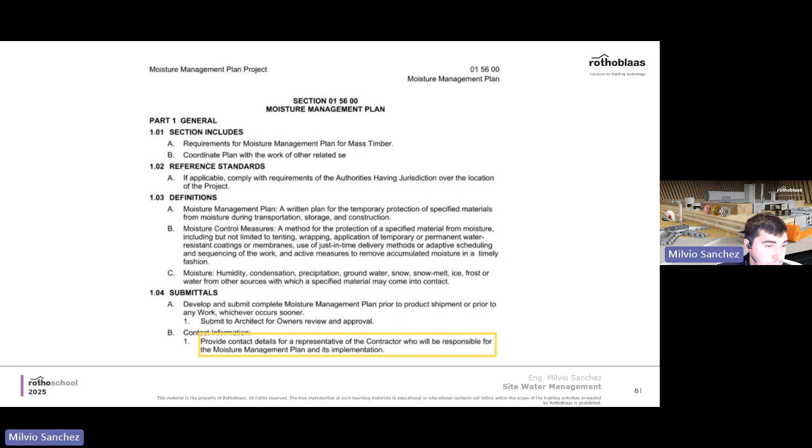But anyways, the contractor is the one responsible in the specifications to make sure that there is a moisture plan in action and it's being implemented. And also, usually it's written that moisture exceeding a certain amount should be considered excessive and remediation should be taken by the contractor.

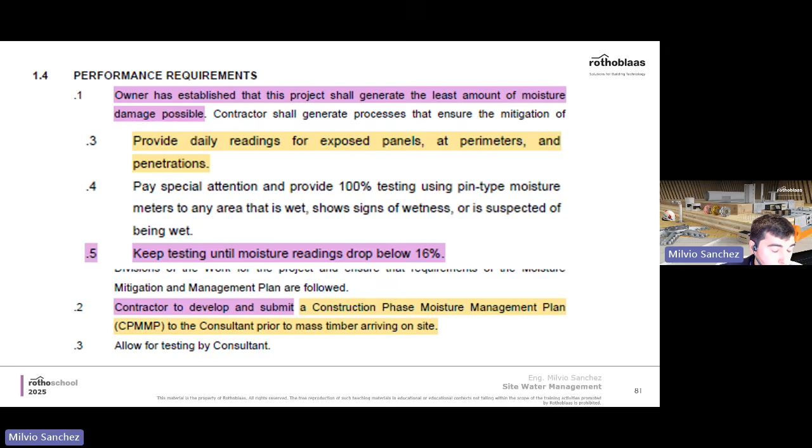And moisture monitoring has to be done extensively to keep the moisture readings below 16%, especially before enclosing the projects. And some field strategies that may happen include water deflection as much as possible, or temporary drains.

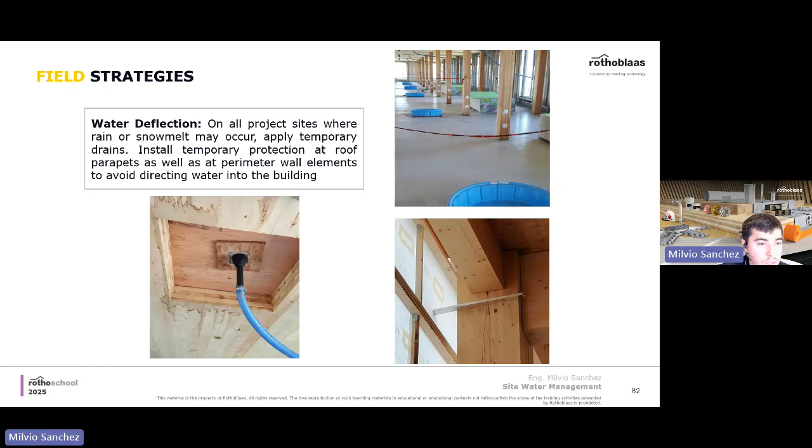They drilled a hole right here and made temporary drainage, because the upper level was open to the weather, and they also installed a steel roller just to guide the moisture and place it away from the job site. It's not perfect as you see, but it gives you some ideas, or shows how thorough they were in the design and also in the construction phase.

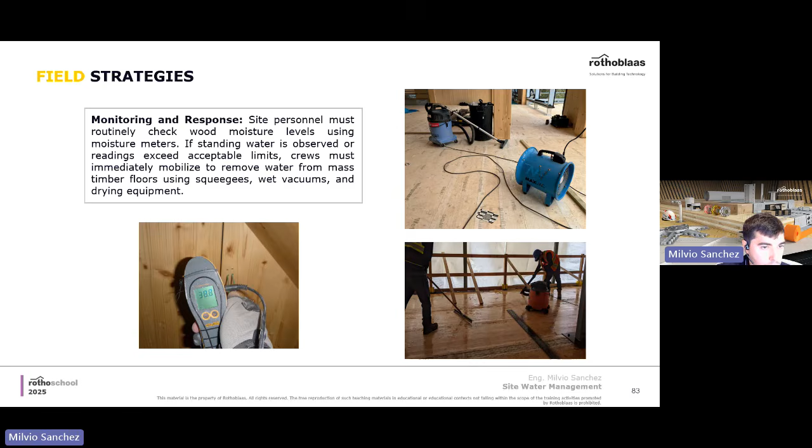As I said, moisture monitoring is really relevant. Mass timber may look perfect from the outside, but sometimes from the inside it may be really wet, and then mechanical ventilation, wiping, or other solutions have to be considered.

And lastly, tenting, right? Of course it depends on the budget. It's not really something we see in every single project, but there are some examples in North America and Europe where even movable tents are used - as soon as they finish the first floor, the tent moves up, and you can make sure every single floor is protected from rain and from any exposure to weather.

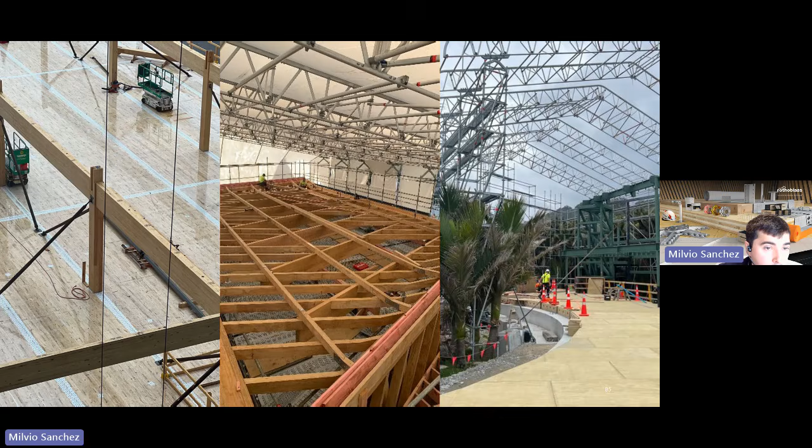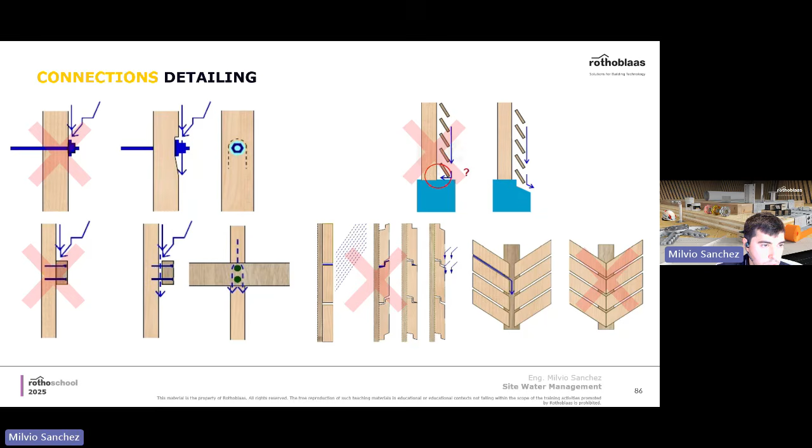And lastly, the connection details, right? So very little changes in direction, very little curvature, not sharp edges, can allow moisture to not get trapped, and your connections won't suffer from this moisture absorption. It's clear that the end grain is much more critical than the side grain, but that doesn't mean the side grain is negligible in terms of moisture.

So ideally, the condition here to protect this panel configuration is taping the end grain, panel protections - temporary or permanent - over the CLTs, and flashing and water protection where needed as well.

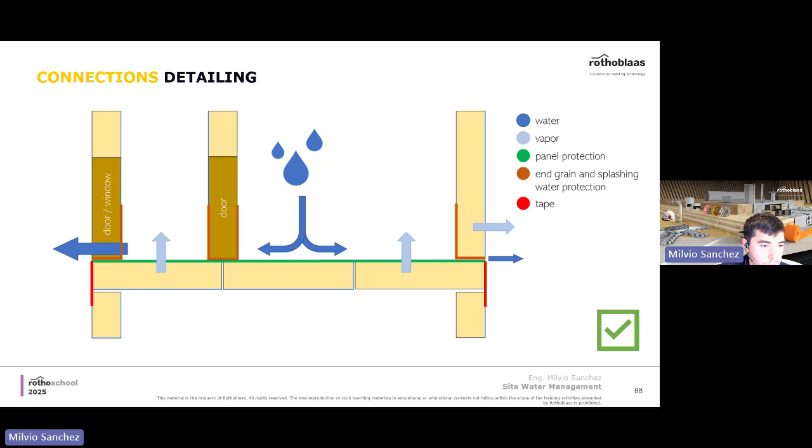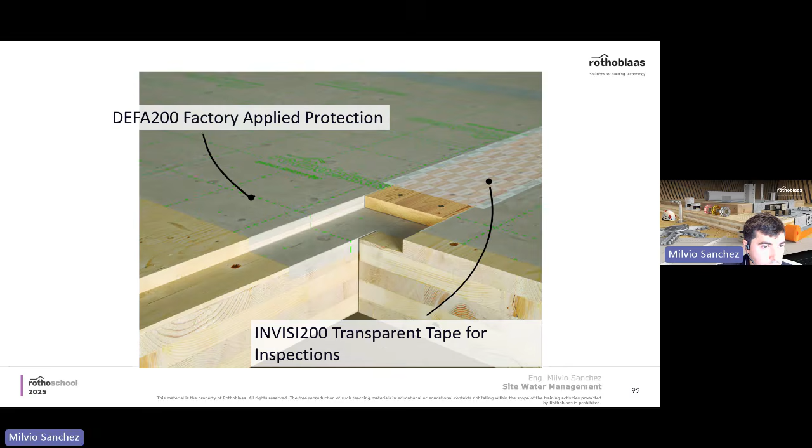Rothoblaas has some options that are on the budget. They are permeable or robust - it's like life, you can never get time, money, and energy, you have to choose two. But we have several solutions: structural solutions, temporary membranes, tapes, or structural shear metal plates that instead of having moisture trapped in plywood spline joints, you have a clear metal plate that doesn't trap moisture, or aluminum profiles that raise the CLTs above the ground, tapes and membranes as well. Other invisible tapes, if structural inspection is really a must, you can see through. Ideally, all of these membranes should be installed in the factory first, so the panels are already protected when they arrive on site.

So finally, moisture control should be part of the design and execution, not only a site issue. Prolonged wetting combined with restrained connections or overstress of the fasteners can lead to swelling, corrosion, and premature failures. Moisture monitoring has to be done during construction and before enclosing the structure, avoiding details that trap water, protecting vulnerable interfaces, using drainage, tapes, membranes, and choosing screws and membranes suitable for the design intent, following correct installation procedures from suppliers. Lastly, designers, suppliers, and installers have to work together - this requires teamwork to reduce moisture-related risk.

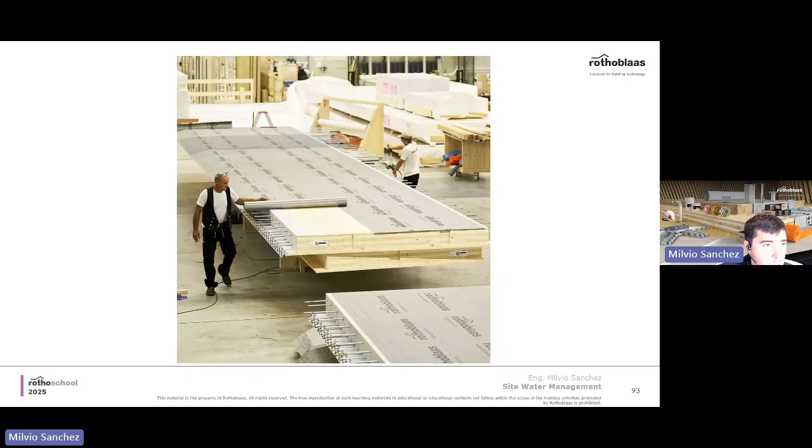Regarding the connections, I guess there was a question here. Ideally, in this case we don't see membranes, but if you place a membrane and then hit it with screws, you should tape it on top of the plates as well, just to make sure it's fully protected. Spline joints and plywood joints are really critical, and as I said, they can swell a lot and fail in a very catastrophic way.